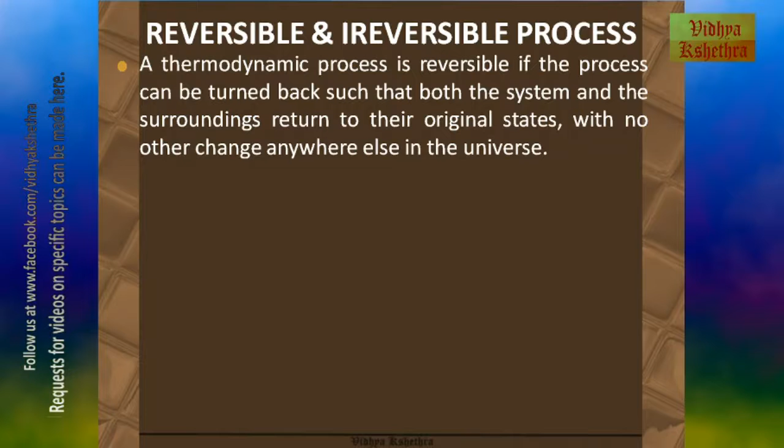First, we shall see what we mean by reversible and irreversible processes. Reversible and irreversible process: a thermodynamic process is reversible if the process can be turned back such that both the system and the surroundings return to their original states, with no other change anywhere else in the universe. In the case of a reversible process, it is possible to bring the values of the state variables back to their original value, that is, when the process started.

But a reversible process is an idealized notion. A process is reversible only if it is quasi-static, that is, the system is in equilibrium with the surroundings at every stage and there are no dissipative effects. There are many dissipative effects like energy loss due to friction, etc. Hence, a reversible process is not possible in the real world.

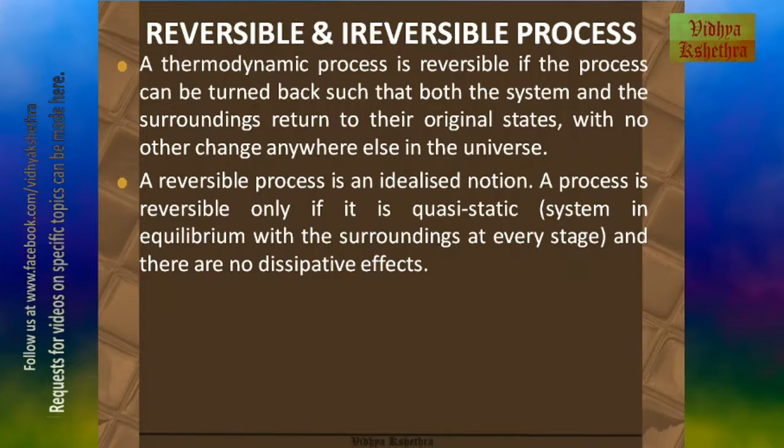But we consider a reversible process in theory because the second law of thermodynamics rules out the possibility of a perfect heat engine with 100% efficiency. It turns out that a heat engine based on idealized reversible processes achieves the highest efficiency possible. So, for determining a design for a heat engine having the maximum efficiency possible, we have to consider a reversible process.

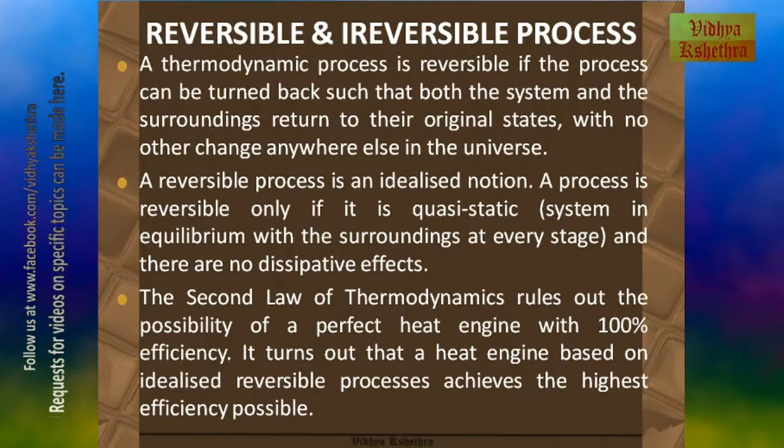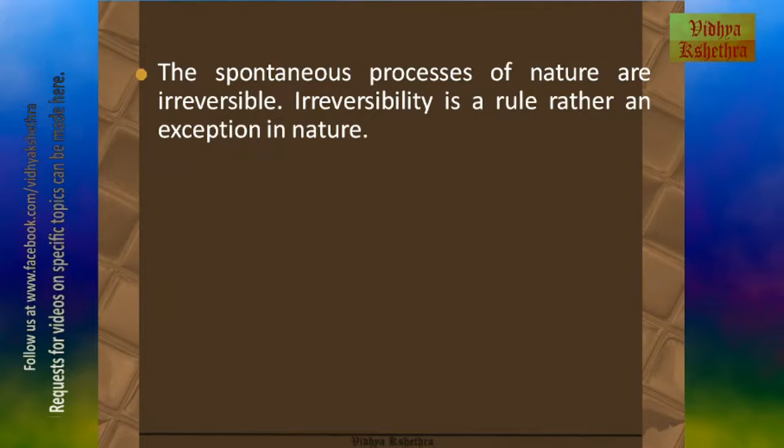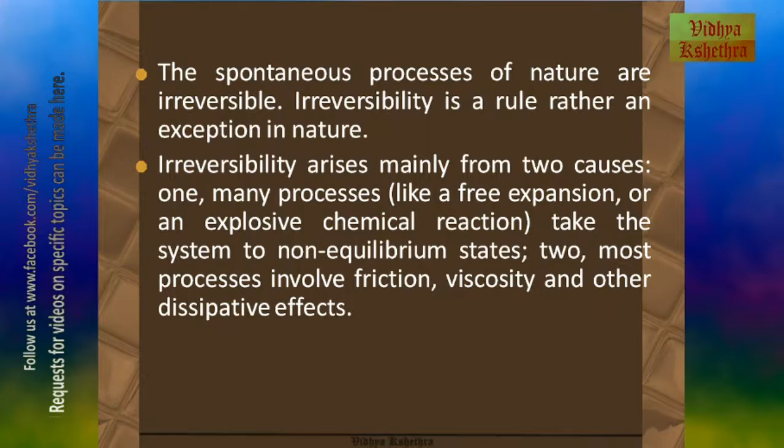Now, the spontaneous processes of nature are irreversible. Irreversibility is a rule rather than an exception in nature. Irreversibility arises mainly from two causes. One, many processes like free expansion or an explosive chemical reaction take the system to non-equilibrium states. Two, most processes involve friction, viscosity and other dissipative effects.

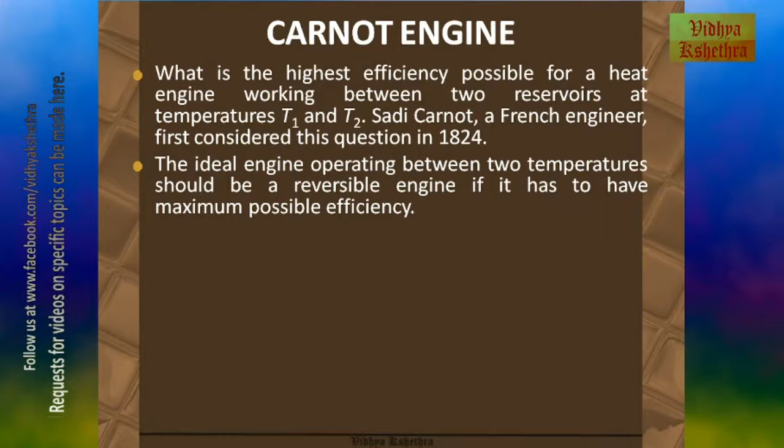Now we shall see the Carnot engine. What is the highest efficiency possible for a heat engine working between two reservoirs at temperatures T1 and T2? Sadi Carnot, a French engineer, first considered this question in 1824, and he was able to come up with an ideal engine operating between two temperatures. For the efficiency to be maximum, the ideal engine has to have a reversible process. A process is reversible if it is quasi-static and non-dissipative, as we have already seen earlier.

So, a reversible heat engine has to absorb heat from the hot reservoir and release heat to the cold reservoir isothermally for the processes to be quasi-static. If there is a temperature difference between the system and surroundings, this process cannot be quasi-static, as the system and surroundings will not be in equilibrium.

Now, to ensure that the processes used to complete the cycle by taking the temperature from T1 to T2 and vice versa are quasi-static, it is better to assume that the process is adiabatic, since it involves no heat flow. So, considering this process which takes the temperature from T1 to T2 as an adiabatic process is much simpler. Hence, the Carnot cycle consists of two isothermal processes and two adiabatic processes.

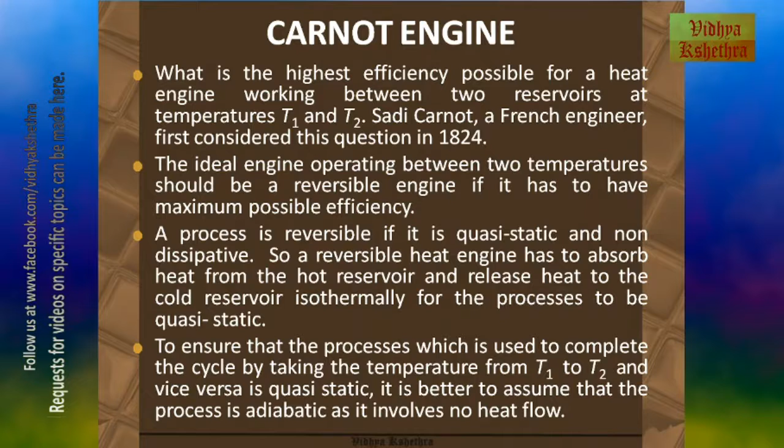Now we shall see the Carnot cycle. For explaining the Carnot cycle, we can consider an ideal gas enclosed in a cylinder having a frictionless piston. Now the cylinder is kept in contact with a hot reservoir of temperature T1.

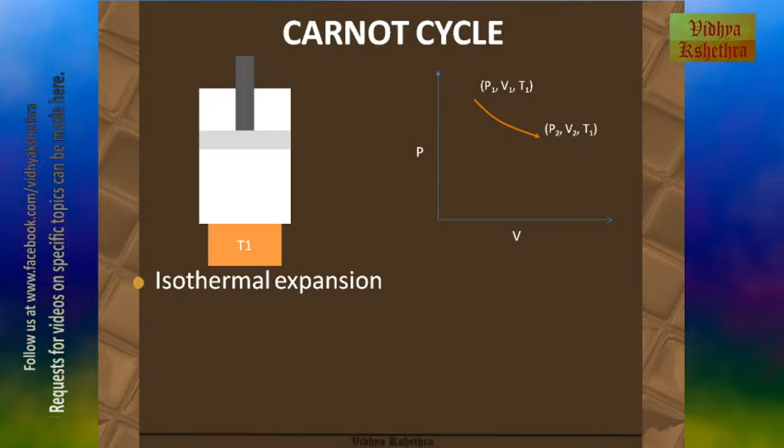Now the next step in the Carnot cycle is the isothermal compression. In this case, work is done on the gas and hence the pressure of the gas increases and the volume decreases. And since the process is isothermal, the temperature remains the same.

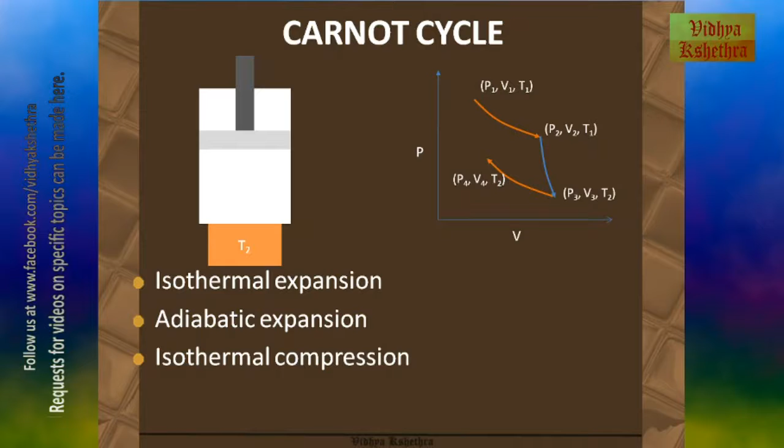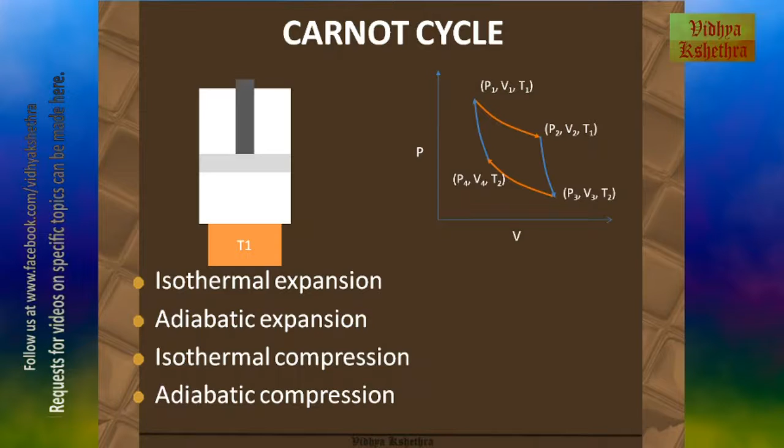Now the final process is the adiabatic compression, which results in bringing the system to its initial state. In this, work is done on the system to raise the temperature back to T1, the pressure is increased back to P1, and the volume of the gas returns back to the initial starting volume, which is V1. So this is the Carnot cycle, and based on this Carnot cycle, Sadi Carnot proposed a heat engine having maximum efficiency.

Now we can see how to calculate the efficiency of a Carnot engine. The work done in the first isothermal expansion, that is 1 to 2, Q1, is given by mu R T1 log of V2 by V1. The work done in the adiabatic expansion, that is W 2 to 3, is given by mu R by gamma minus 1 into T1 minus T2.

The work done on the gas in the isothermal compression, Q2, is given by mu R T2 log of V3 by V4. And the work done in the final adiabatic compression is given by mu R by gamma minus 1 into T1 minus T2. So the total work done in a Carnot engine, W, is given by the sum of all the work done in the cycle. That is, W is equal to W of 1 to 2 plus W of 2 to 3 plus W of 3 to 4 plus W of 4 to 1.

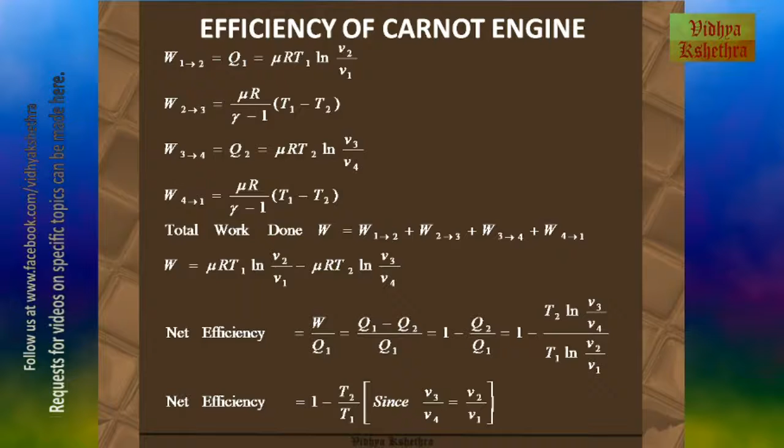So this is the end of this video. In this video, I have discussed the concept of the Carnot engine.